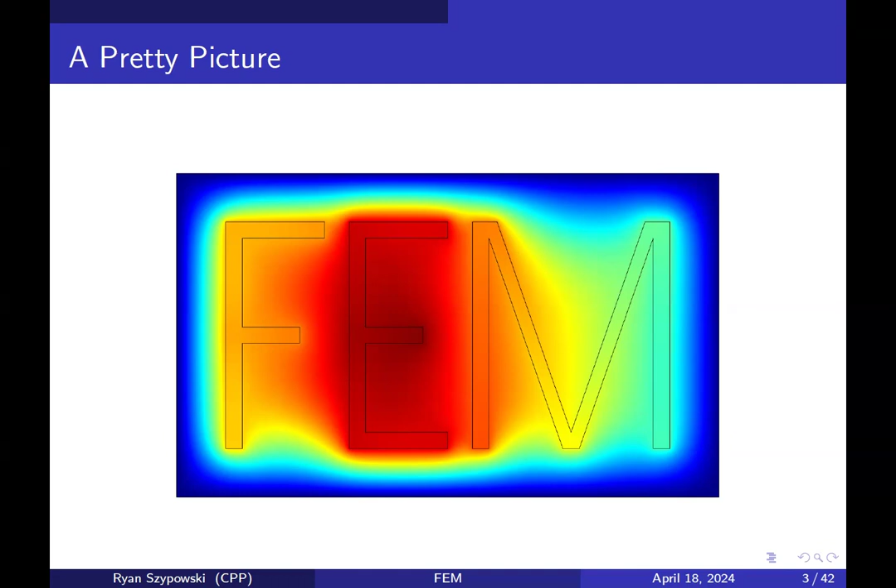So a quick outline, I'll do an intro to PDEs and the finite element method. I'll talk a little bit more specifically about the adaptive finite element method, because that's actually where I've spent most of my own time researching. I'll talk about a few pitfalls that if you're just a user of finite elements, you might end up in. I'll focus on one major one, but there are a number of pitfalls that you might fall into if you're just using the finite element method without really knowing the mathematics behind it.

And then I'll spend some time doing some demos. And those demos are going to be in either COMSOL, or I will also very quickly at least show you some Python code using the package known as FEniCS. And so I'll talk a little bit about FEniCS as well. Before ever being introduced to Dr. Salik and working in COMSOL, I used FEniCS for almost all of my solutions in the finite element world. Either that or smaller packages, like ones written by my advisor originally, stuff like that.

So, okay. So what's a PDE? A PDE, the E stands for equation. A PDE is an equation where the unknown thing that we're solving for is a function. It's a multivariable function, so it depends on multiple inputs, x, y, z, t, that kind of a thing. And then the equation itself has that unknown variable. It appears in the equation differentiated, partially differentiated, right? Because it's a function of multiple variables. So we can't talk about just the derivative. That's a PDE, any equation like that, okay?

They're used to model tons and tons of things in science and engineering. The first bullet point talks about the three classic linear PDEs, the Laplace-Poisson equation, the heat equation, and the wave equation. They're classics because they characterize three very different types of solutions that behave very differently. I'll talk a little bit more about that on the next slide.

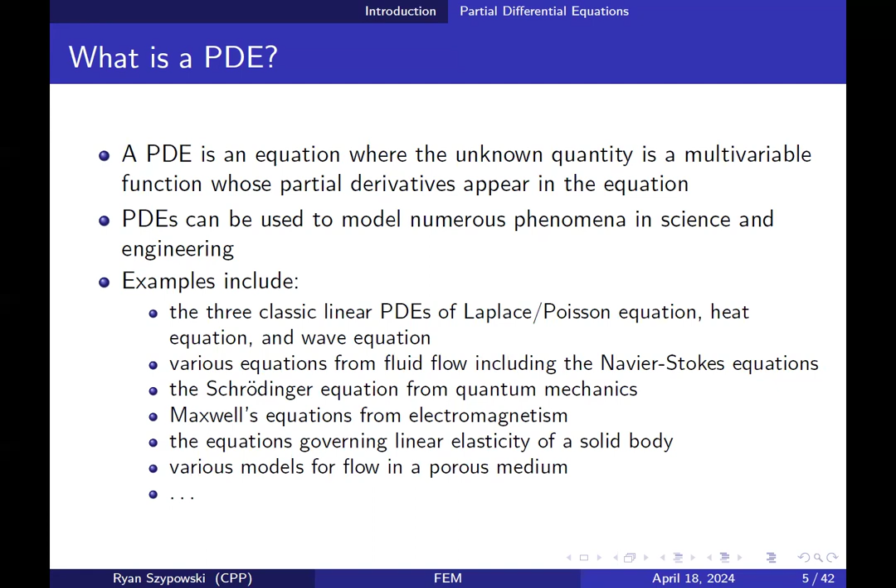Typically, PDEs get classified into three categories. We name them based on conic sections: elliptic PDEs, parabolic PDEs, and hyperbolic PDEs. Elliptic PDEs are generally stationary. They're static in time. So they would be like if you wanted to study the heat distribution in this room, but not changing. So you assume that you've flowed time to infinity and there's no motion in the room. What corner is going to be hot? What corner is going to be cold? That would be an elliptic PDE. And that would actually just be the Poisson equation or the Laplace equation.

Parabolic and hyperbolic equations are time dependent, and they have a very different characteristic. Parabolic equations sort of have a decay. The heat equation is a parabolic equation. So if you wanted to study the heat distribution in this room, but as a function of time, you'd be solving a parabolic equation, whereas the hyperbolic equations are usually wave-like. There's some sort of propagation. There might be loss of energy as it propagates and things like that, but there's much more direct propagation of information in hyperbolic equations, okay?

As I said earlier, most of what I'm going to be talking about today is going to be related to elliptic equations, but the finite element method can be applied in various ways and shapes to parabolic and hyperbolic equations. It's actually quite easy to do it for parabolic usually, where you at least use finite elements in space, and then you just do ODE time stepping in time. Hyperbolic equations are a little bit more challenging usually, but there are techniques there as well.

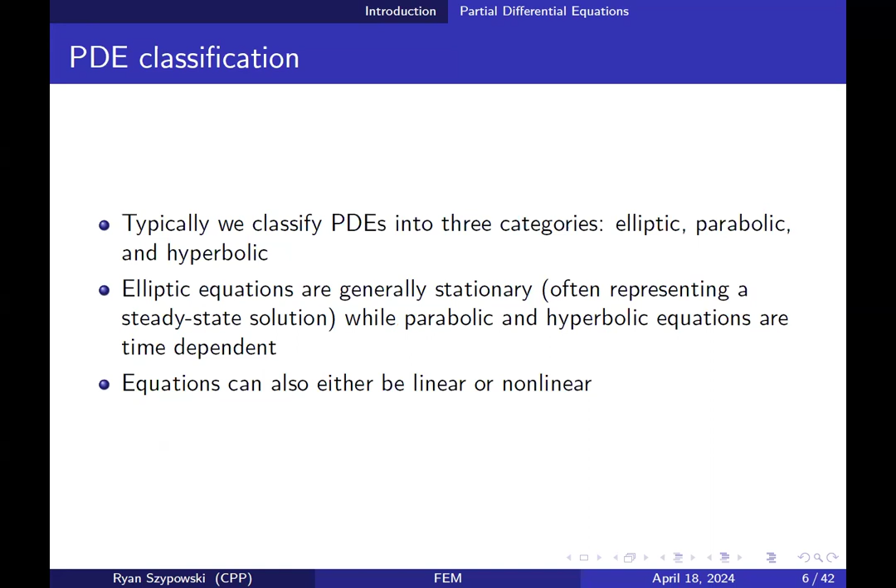So what else is there to do with PDEs though? On that picture, you saw that I was solving this PDE just in some rectangular region. We don't normally solve our PDEs in all of space or all of space-time. We have some bounded domain, which I'm just going to call omega here. And then maybe the problem's time dependent, so then you have a bounded spatial domain and also time going from 0 to some final time.

And then if you think back to your ODE classes that you've maybe taken, where you were solving mostly initial value problems, you had maybe a system of ODEs, or maybe just a single higher order ODE. And then in order to get an actual unique solution to that problem, you'd impose additional conditions on that solution. You'd have the ODE, but then you'd also have a set of initial values.

Well, in PDEs, especially ones like elliptic PDEs, we have what we call boundary values because we impose some sort of conditions around the outside of the domain. If it's time dependent, then we do include initial conditions as well, usually. Okay, these are the typical setups. And then there's lots of different types of boundary conditions. I'll throw some names around throughout the talk, but hopefully from the context you'll pick up what they mean.

But the two classic ones would be what are called Dirichlet boundary conditions or essential boundary conditions. Those are boundary conditions where you specify the value of the unknown function explicitly. And then Neumann boundary conditions, or natural boundary conditions, where you are specifying the value of the derivative of the function, usually the normal derivative of the function on the boundary. You'll see examples of those come up as I show examples of the PDEs later.

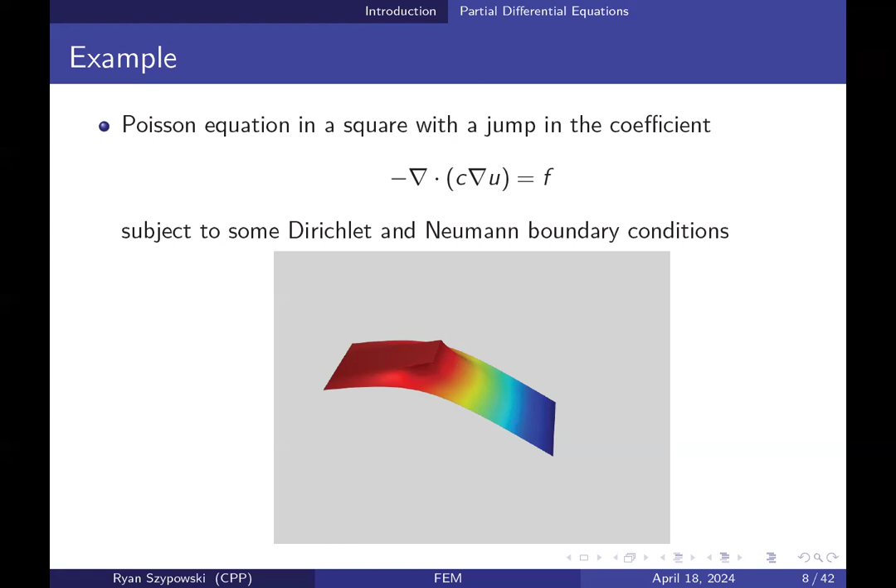So step one of arriving at the weak form is to say, I'm going to test these equations against something. I'm not going to evaluate them at a whole bunch of different x's. I'm going to test them by taking an arbitrary test function v, that is the terminology we use. I might call u the trial function, and then I call v the test function here.

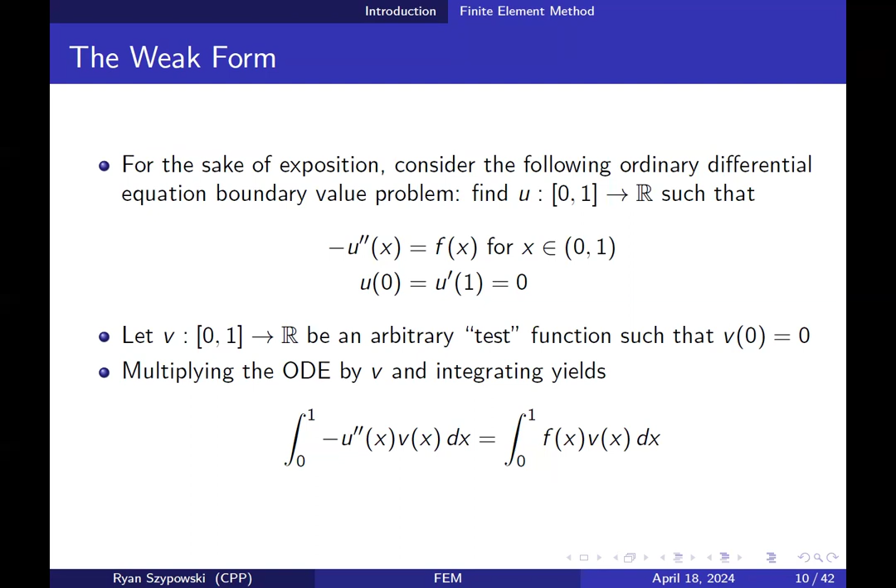So the rule of thumb in the finite element method and just PDEs in general, if you're going for a weak form, is multiply by a test function and integrate by parts. Whatever that means, if you're in higher dimensions, you're using a Stokes or a Green's theorem type thing, but it's all integration by parts. So if we integrate this by parts, that negative u double prime is going to become a u prime, and we will have differentiated the other part, so the v will become a v prime.

So the v du or whatever part is going to be this, right? And then it's an integral on a domain, so we're going to have to evaluate something on the boundary, and in particular this u prime v would need to be evaluated on the boundary. We now see why I included in v that I'm going to enforce v of 0 is 0. I do that so that when this term gets evaluated at 0, I have no idea what this is, but I know this is 0, so it vanishes.

When x is 1, I don't know what v of 1 is, but remember one of the boundary conditions was that u prime of 1 was 0, so I do know that this is 0 and it vanishes. So both terms here vanish for different reasons. One vanishes because of the boundary condition on u at the right, and the other one vanishes because of the boundary condition I imposed on the test function v at the left.

This, by the way, is why Dirichlet and Neumann get called essential and natural. The boundary condition at 0 was an essential boundary condition because I had to bake it into v, into the test space, whereas it was natural that the upper term was going to vanish because the Neumann boundary condition handles that. It handled itself naturally. So at the end of the day, after imposing those boundary conditions, this is the equation we're left with. Look for a u that satisfies this for every choice of v.

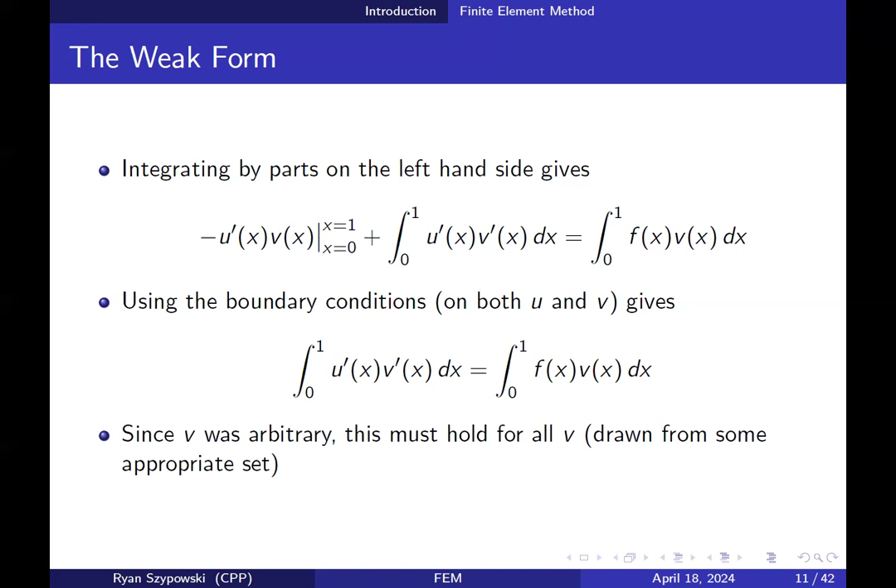And we're now starting to see that every choice of v is a little bit misleading, because clearly something has to be true about v. We see what we do to v in this equation. There's definitely two things that have to be true about v. V needs to be able to be underneath an integral sign after multiplying by stuff, so we need to be able to integrate it. But we also need to be able to differentiate it. So it's not every possible function v, but at least a lot of functions. For example, piecewise linears.

So our weak form is this problem. The full problem in weak form is find u in some space V, I'm just going to be very vague about that, such that the integral from 0 to 1 of u prime v prime equals the integral from 0 to 1 of f v for all v in the space. To make this more rigorous, I'd have to define what the space V is. That would require a discussion of Sobolev spaces and Hilbert spaces, but that's the idea. That is the weak form of a PDE. So this is what I'm going to approximate solutions to, not the original strong form of the PDE.

There is another way to derive this, by the way, that might be more interesting to you if you view problems from an energy perspective. If your PDE really came from minimizing some energy, then this can pop out from that approach as well, where you're just using calculus of variations, and then v is sort of like the variation, right? So, all right.

Let's move on though. So that's the problem that we're going to solve. So how then do we approximate it? Well, this problem I still can't solve exactly, because V is an infinite dimensional function space. I can't describe all functions that satisfy this in any easy way, not with some basis or anything like that, which is what we really want.

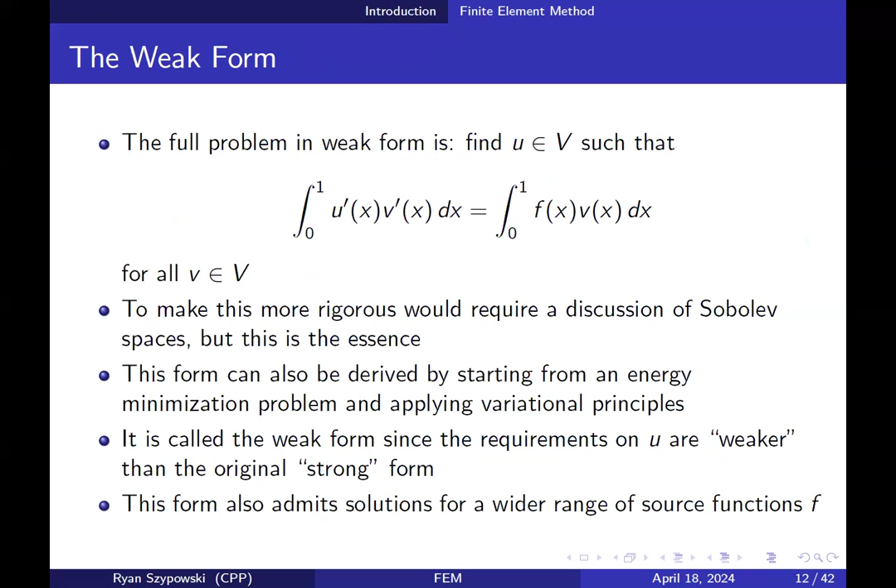So we're going to replace V by a finite dimensional space. And if we do that, then using our linear algebra ideas, there's some basis for it. There's some set of functions, phi 1 through phi n, that when I take all linear combinations of them, they span VH. So I don't look for a U in all of V, I look for a U in the span of this set of functions.

So that means I'm really just looking for some coefficients, the UIs. I turn my problem from a problem about finding a function into a problem about finding a vector. Just a bunch of numbers. What do they satisfy? Well, when I plug this into the equation, this equation is satisfied for all V.

But it can't be all V. That's too many equations. I only have n unknowns, so I need n equations, right? We know we probably want the same number of equations as unknowns. So what do I do? Well, I also restrict V to be in that same finite dimensional space. This is what's called the Galerkin approach.

There are other approaches where you might choose different spaces for the test and trial space. This is the classic Galerkin approach, what you'd see most often in the finite element method. And then by linearity, we can use these basis functions to rewrite this in a much more natural way. So the equation finally becomes this.

I'm really just looking for a vector U with components UI, I running from 1 up to n, such that those numbers times these numbers summed up equal these numbers for every j. That's just a system of linear equations, n linear equations in n unknowns. It's got some complicated numbers in it. These form the coefficients of the matrix in the problem.

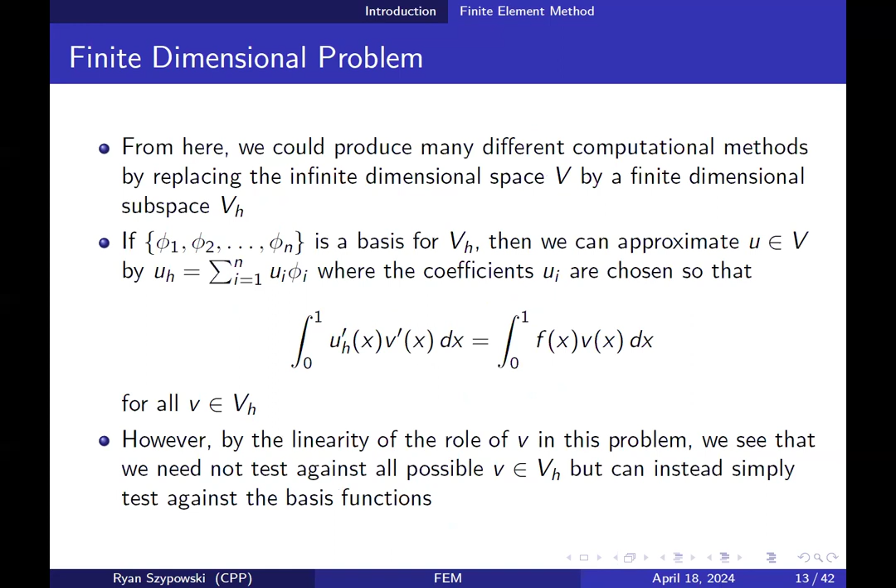We toss this into something that computes solutions to AX equals B, like MATLAB, and we get a set of U's. And then if we want the function, we just go back to this formula, where the solution is represented as a particular linear combination of those functions. So it all comes down to that.

This still isn't the finite element method. This is just a Galerkin method. So what makes it the finite element method? It's a specific set of choices for these basis functions. This works no matter what finite dimensional subspace you pick. The finite element method is all about picking piecewise polynomials or similar things for those basis functions.

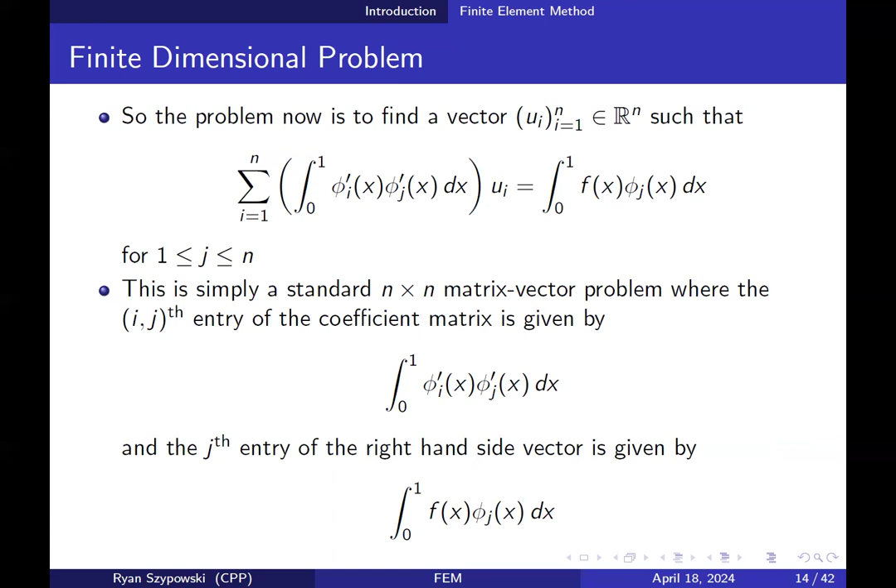So in one dimension, we might take our domain 0, 1 and split it up into subintervals. These would be called the elements. There's an element from 0 to 0.2, from 0.2 to 0.4, and so on. On each element, you define a set of basis functions. If I'm doing piecewise linears, I would have one basis function associated with each node.

So there's a basis function associated with the node at 0. What basis function is it? It's the one that's linear on the element that it's on, goes from 1 to 0, and then it's 0 across all other elements. Then there's a basis function associated with 0.2.

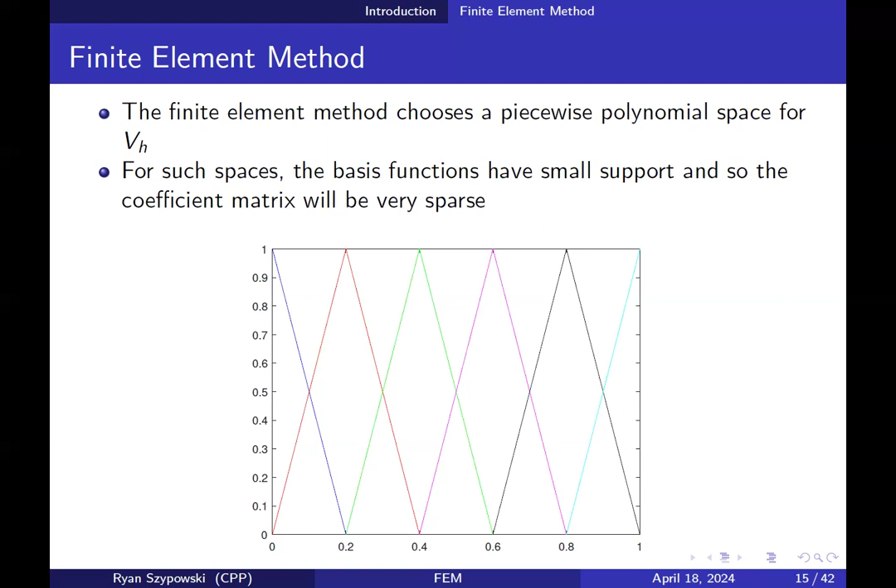That's the function that's linear on the two adjacent elements, goes from 0 up to a peak of 1, and then back down to 0, and then it's 0 on all the other elements. So each of these colors, the blue, the red, the green, the magenta, the black, and the cyan, are each different basis functions. So if I take a span of all of these basis functions, I get the set of all piecewise linear functions that are piecewise linear on that mesh. Okay? And I look for a solution in that space. All right? That's the finite element method.

In 2 dimensions. I can't draw the picture in 3 dimensions, I'd need to be able to do it in 4, right? But that's the idea, okay? And this is the piecewise linear case. It doesn't have to be piecewise linear. You can do piecewise quadratics, piecewise cubics, lots of other things, especially when you get to vector valued unknowns where, yeah, it gets complicated, but that's the basic idea.

So, yes, Ertan. So for example, COMSOL, what is the default choice? Is it usually linear or? I believe the default in COMSOL, every time I have done something for the Poisson equation, it always picks quadratic. It always steps up by 1. And I always drop it back to linear because I like them best. I don't know why. It's because that's where I'm just the most comfortable in all the theory.

And how much does that affect the computation time? So we can talk about the number of degrees of freedom. This depends on 2D versus 1D versus 3D in some senses. If you're in 1 dimension, then the number of degrees of freedom for a piecewise linear is just equal to the number of nodes in your mesh. And then if you step up to quadratics, then you have a degree of freedom at both endpoints of every interval, and you also have a quadratic bump function.

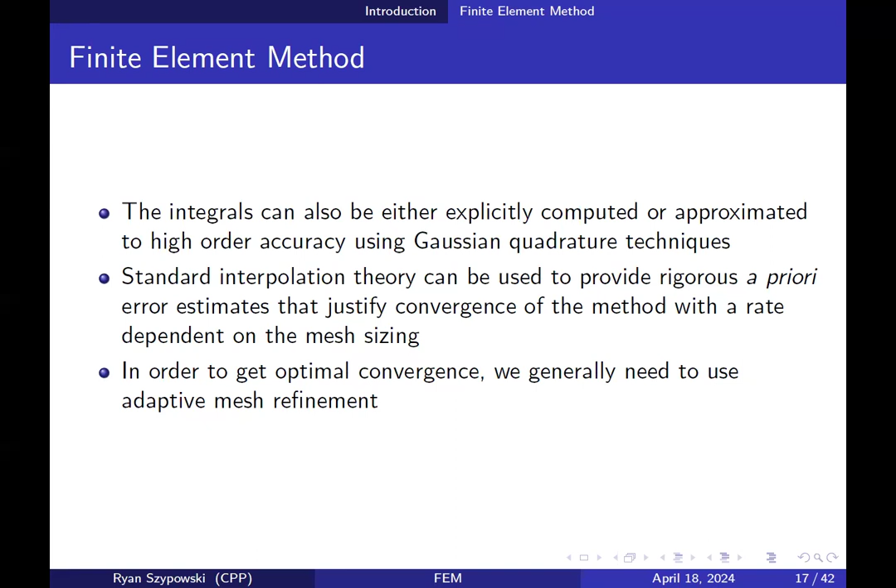I already led to this though, which is the finite element method doesn't just put a mesh, put the basis functions and solve. That's the basic finite element method. But instead, in order to get a more accurate answer than we had a second ago, we iterate a process. We adapt the mesh or the polynomial degree. So this is the classic structure of the algorithm for what's called the adaptive finite element method.

So what is the adaptive finite element method? Well, we're going to start with an initial mesh. Okay? We're going to solve, quote unquote, the problem on that mesh to get something that I'm just calling UK here. Then we do a step which is interesting. So this is one thing I always harp on when I teach numerical analysis.

We are approximating solutions to things. So there's exactly one thing we can never know. We can never know the actual error, because if we had an approximation and we knew the error in that approximation, then why don't we just add those two things and get the exact solution? But we don't know the exact solution. That's why we're approximating the solution, right? So we never know the exact solution or the exact error in our solution, but we can use fancy mathematics tricks to be able to estimate the error by, say, a number.

So what we can do is say, in this triangle, somehow this triangle is attributing 0.5 to the total error. This is a process called error estimation. More specifically, a posteriori error estimation, because we are using the current approximate solution to do that. So we're doing it after the fact, hence a posteriori. We estimate the error, and we get what are called error indicators. They're not error values. They somehow indicate what is contributing to the error being large. And that's what these etas are supposed to represent.

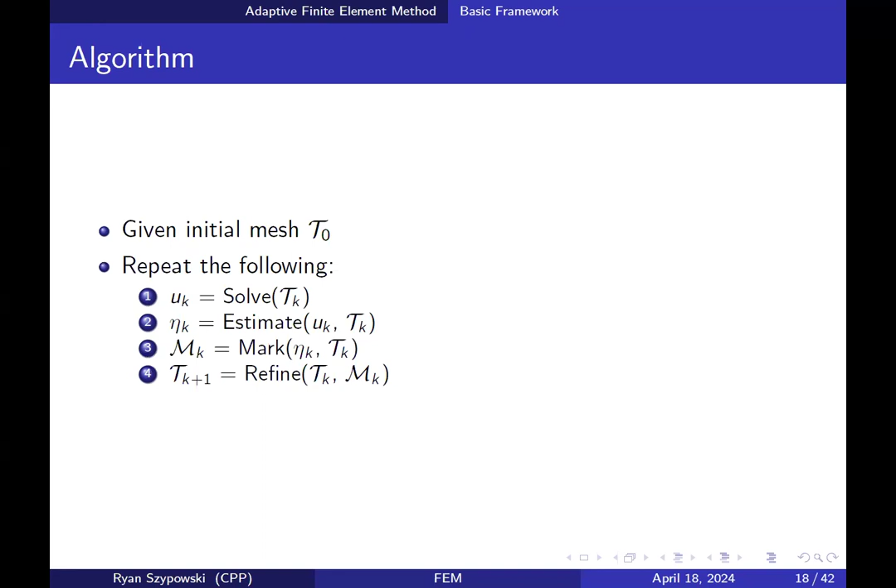And this is the mathematician in me now. It's not just that I expect it, I can prove it. This algorithm is provably convergent for a huge class of PDEs. Okay, so this is where the mathematician in me would spend another 5 hours talking about the theory behind that, but I'm not going to bore anyone with that. Okay, so I'll just go through those steps individually.

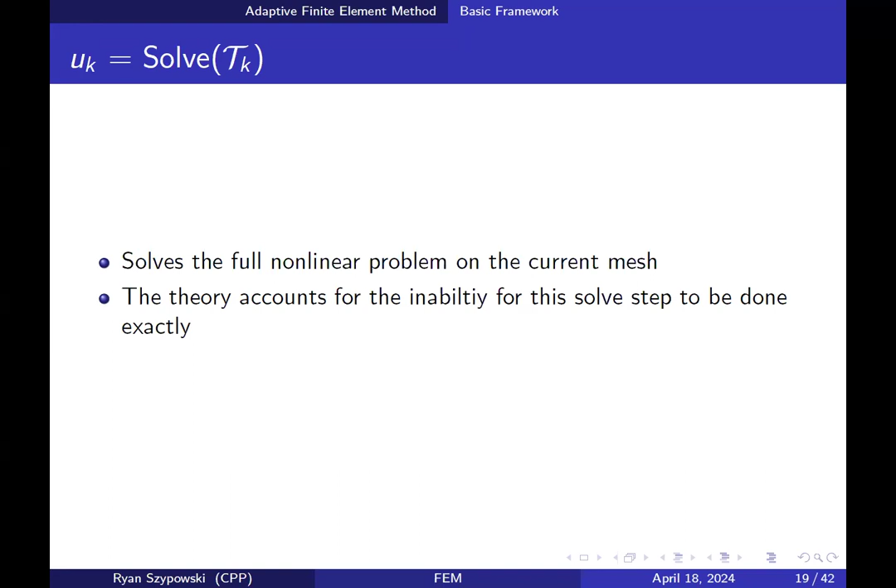Solve the problem. I do want to point out we don't ever actually even exactly solve the individual problem we have, because solving AX equals B is hard. You're going to make errors just when you're doing that. Okay, so the method is robust to that. And I'll talk a little bit about that when I get to COMSOL. Estimating, like I said, is to approximate the error.

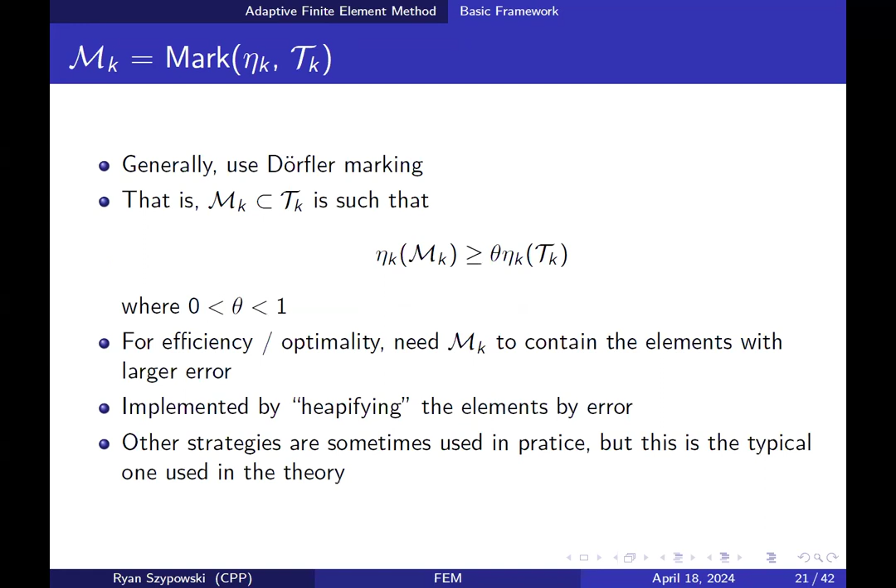Let's move on. Marking, in the theory, is usually done by something called Dörfler marking. But again, when I get to COMSOL, you'll see they don't use this terminology. They don't do exactly this, and it still works. And then finally, refining. This is just to show you that classically in the theory, we use a refinement technique called newest vertex, but that's really hard to implement. So most people implement longest edge.

So now there's this node hanging in the middle of an edge. We can't have that. We need our meshes to be what are called conforming. And so even though this triangle was marked for refinement and maybe this neighbor wasn't, this neighbor might get refined too. So more than just the marked elements get refined. But yeah, that's that. So, all right.

I should probably start doing demos soon, but this is getting to some pretty pictures. This is the pitfalls section, and I'll just talk about this one pitfall because of time. There's a big issue when you're using the finite element method, which is choosing your function space. So for simple enough problems, you can probably just head into COMSOL, have it do its defaults, and you're going to be fine with that.

But if you are solving a PDE more the way I do, which is I don't think of the physics first, I'm sorry, I think of the math. And so I go in and I'll actually show you the interface I've been using most in COMSOL, and you guys might get mad, but it's just the reality. I have to pick my finite element space very carefully because I can't necessarily just rely on COMSOL's defaults. And maybe you shouldn't either as a physicist.

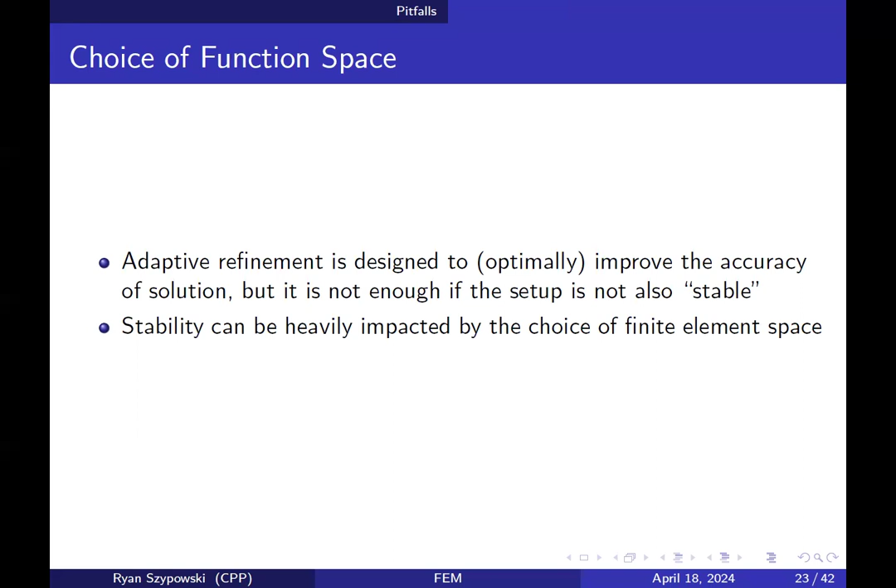I think there's a conversation to have there at least anytime you're choosing these, because I can show you how badly this can go. I'm going to solve a very simple problem very poorly. I'm going to solve the Laplace equation again, the Poisson equation again, but I'm going to do it in a different form, what's called the mixed form. I'm going to introduce a second variable into the problem. I'm going to use the unknown from before, but I'm going to introduce its flux as a second variable. So I don't just want to find u, I also want to find its flux.

Well, one way to do that would be to find u and then differentiate u and get the flux. Or I can put them both in as unknowns into the original problem and solve for them simultaneously. So that's what I'm going to do here. If I convert to the weak form, it looks like this. You now have two test functions, v and tau. And so this has to be true for all choices of tau and all choices of v. And the reason I'm doing it this way is now I not only have to pick a function space for u alone, I now have to pick a function space for u and sigma. And there are a lot of really bad choices for that in combination.

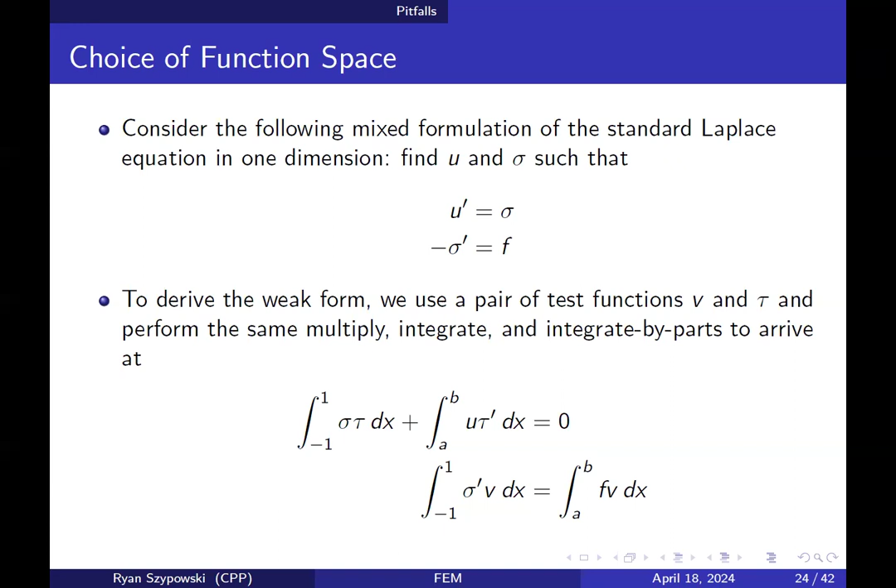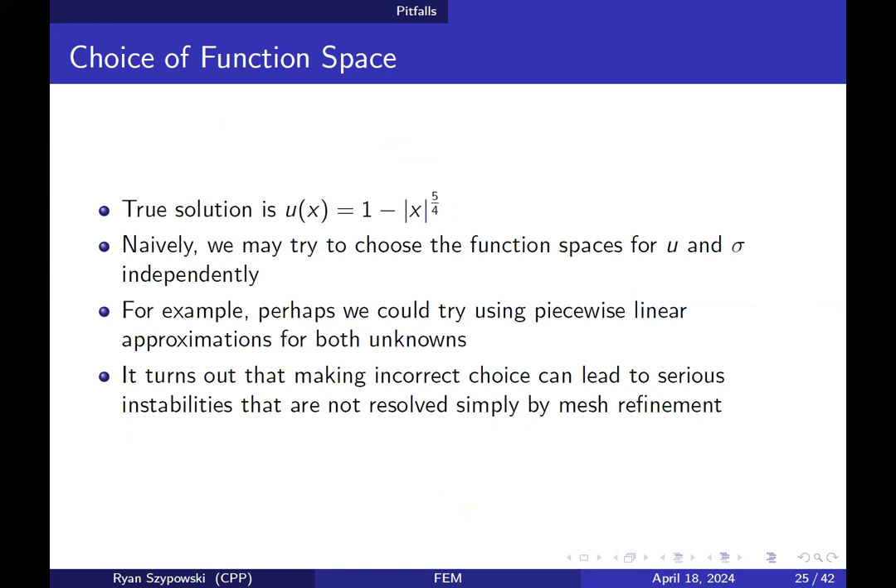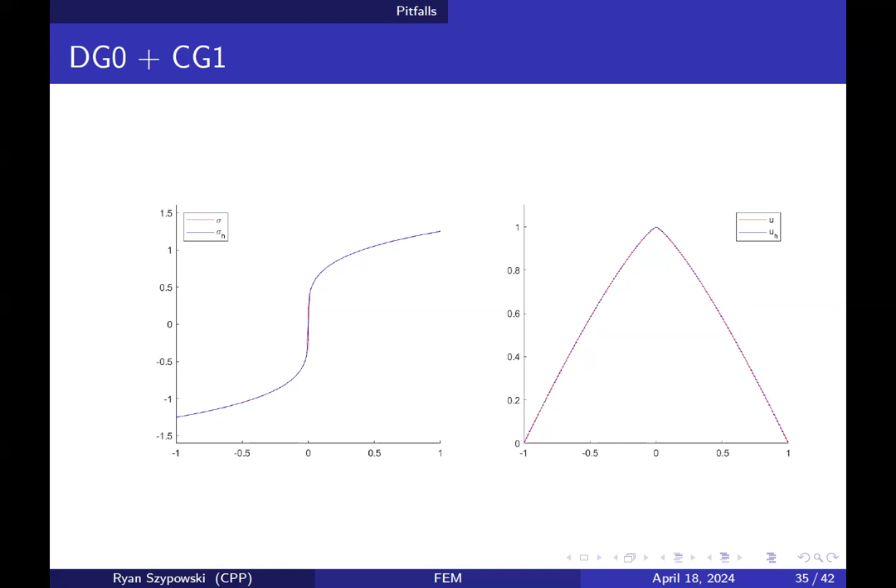So by there, the blue dots are on top of the red dots. I think that's pretty good. So it can work. I just had to pick a different function space. But just to show you that it can go wrong other ways, piecewise constants wasn't the fix on its own. Because if I also tried piecewise quadratics over there, then you still get instabilities. Okay, that's enough of that.

Okay, so let me quickly, because I have like 5 minutes left, right? I want to load COMSOL at some point. Okay.

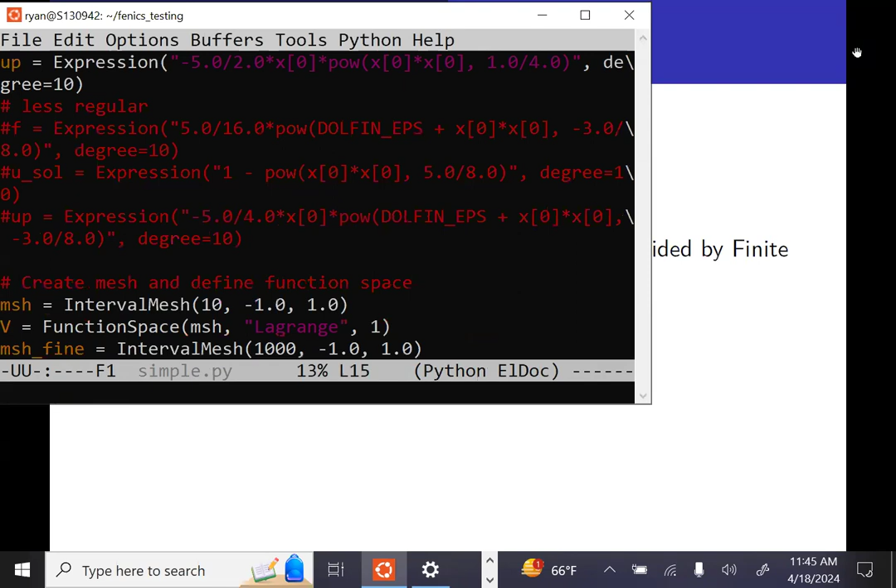I want to show you two things. I want to show you what FEniCS code looks like, just so that you know. Okay, that's unreadable, but it's basically Python code where you type in actual stuff about the weak form and things like that. So down here, let me show you this at least. This here is me defining the weak form.

So this A equals u.dx(0) times v.dx(0). This is saying u prime times v prime integrated dx. So you literally, in FEniCS, you build in your weak form, and then you just say, solve my problem, please. And it does it. So that's FEniCS. It's very useful. It's what I used for most of my career. But what does COMSOL look like?

COMSOL looks like this. So COMSOL is where you can do actual physics, I think. You can do it in FEniCS. People do. You can go to the FEniCS website; I've got it over here if anyone's interested. Like I said, it's just a Python package. You can see that people are doing actual real simulations of fluid flow problems and everything like that. But in COMSOL, the way you're going to do this is you set up the physics that you're trying to solve.

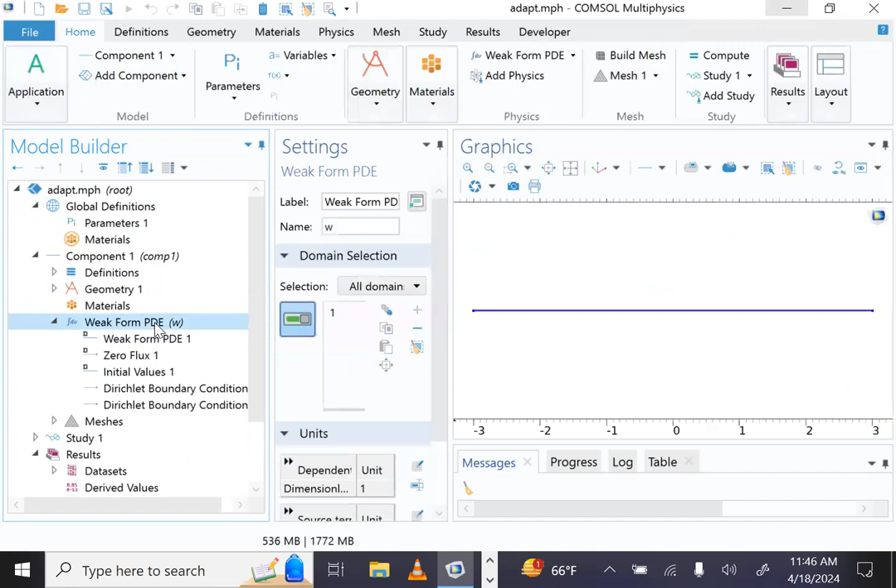And you will notice that this is what I was meaning. I am almost always these days just using the weak form PDE, which is almost certainly what most people in the room would not be using. I like having to write down what my weak form is. So I know I'm actually going to apply it to the Poisson equation, but I'm not going to do that by clicking on the Poisson equation stuff. I'm going to click on weak form, and then type in the weak form. So we add physics there. Let me show you.

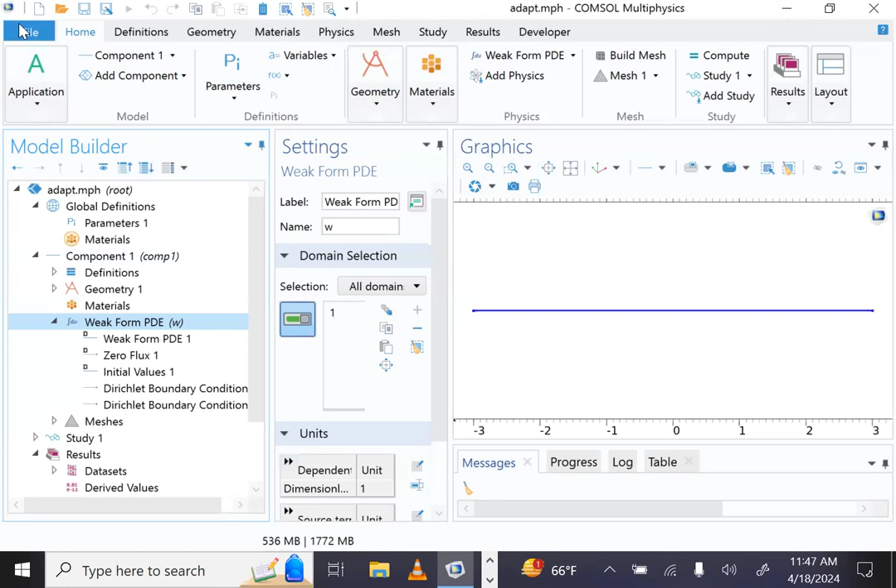So when you go to make one of these models, you go to the new model wizard and you say you want to do a 1D problem, let's say. You folks are probably clicking on, oh, I want to do some acoustics, and I don't know what any of that stuff is. I want to do some math. I want to solve some PDEs. I want to do that in the weak form. That's what I do.

That's a bit of a lie, because when I was doing some of the classic PDEs, I also go and say, I want to solve the Poisson equation. But I don't think about what physics that's representing. I just think about the math. So how do you use COMSOL? You do exactly this kind of stuff.

I'm gonna go back to one of the ones I had a second ago and show some neat things. Where's the one that I want to show? Let me go to open and grab this one. So I made this problem because it's something I did in a paper years ago. I wrote code myself in the paper, and I wanted to see what COMSOL looks like for this. So I'm just going to walk through a little bit here and then point out some of the things in COMSOL.

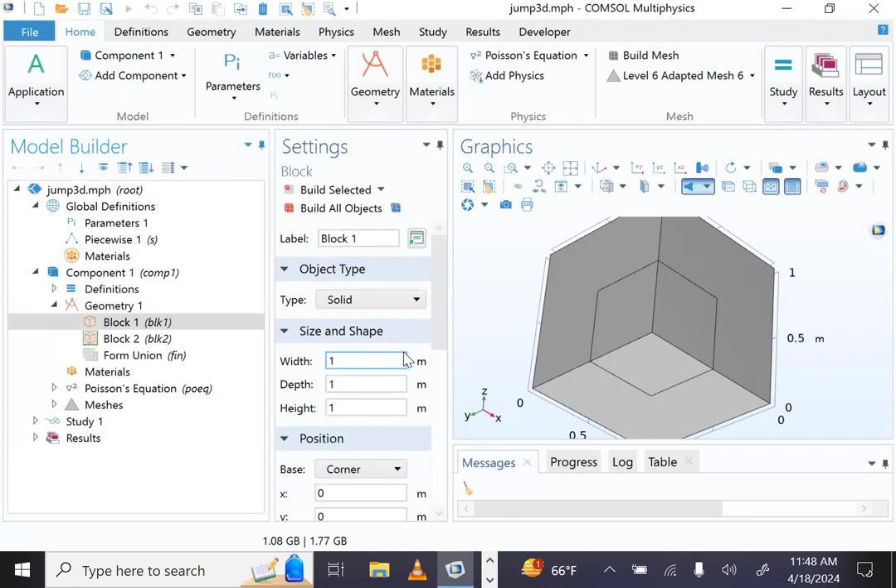This is a Poisson equation. And you'll notice here, it is actually a Poisson equation, not a weak form of a Poisson equation. But it is a Poisson equation with a weird coefficient. So this is me defining the coefficient. You probably can't read it, but I will tell you the coefficient now, because the geometry tells me the coefficient.

This is also where, if I was an expert in COMSOL, I wouldn't do it this way. I'd do it by defining a material, but I have no idea how to do it. So I'm going to solve on a cube, but then there's an inset smaller cube. So this is a 1 by 1 cube, and there's a half by half cube. I'm going to have a large diffusion coefficient in this small cube, and then a small diffusion coefficient in the outside part. That's what we have.

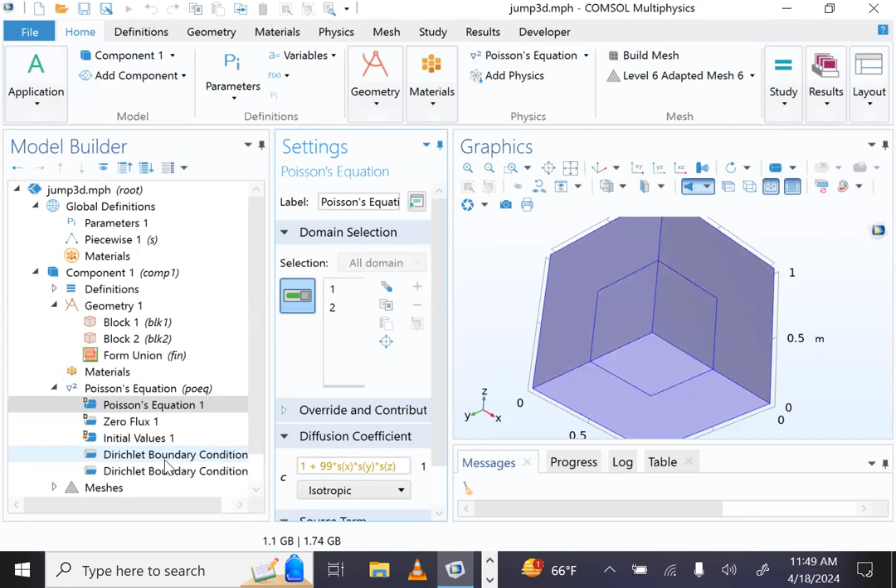And you then define boundary conditions. So my boundary conditions are along this face and the far face. It's 1 here and 0 here. And then all the other 4 faces, it's natural boundary conditions, insulated boundary conditions. And then you build a mesh. Let me show you the mesh I built. And when I say you build a mesh, I mean you click a button and it builds a mesh for you. I did nothing for this.

Though, again, as a mathematician, I do one thing, and that is I always move away from the default on element size, and I always go to extremely coarse, because I don't trust COMSOL to build a good mesh as a first step. I trust the math to build a good mesh. I trust the adaptive finite element method to build a good mesh. So I'm going to start with a coarse one, and then let the adaptive process build up a finer mesh. That's how I always do it.

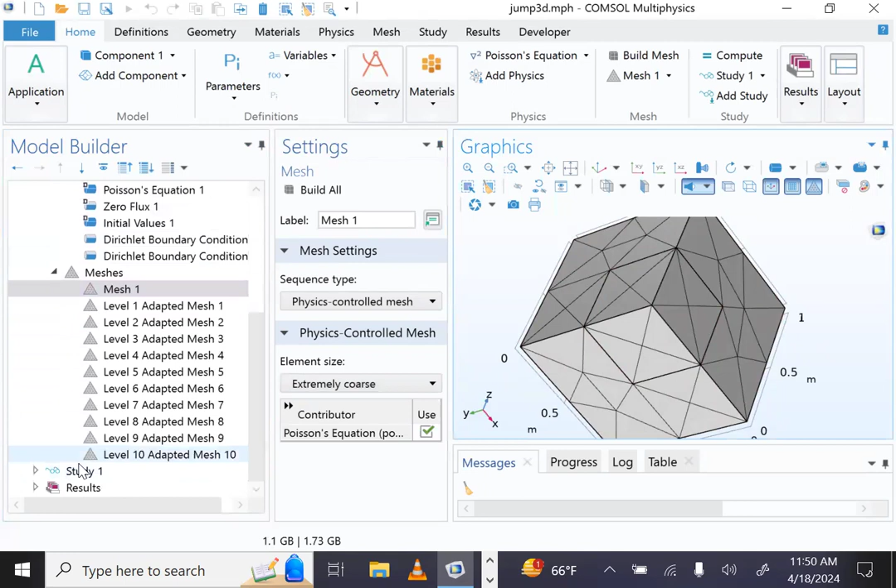This is just the mathematician in me again. So I start with an extremely coarse one, and this is the mesh over here. Whoops, trying to spin the picture. So there's a mesh. It's got a bunch of tetrahedra on the inside that we can't see. And then I go down to the study, and this is where I turn on the magic, which is I turn on adaptation. By default, it's not on. I turn on adaptation and error estimates.

Here's where I go with the defaults, and that's just because I can't find the thing I really want. As a mathematician, what I really want is residual-based error estimation, and then Dörfler marking for my refinement and stuff like that. I go with the defaults, and they seem to work. They work kind of more rapidly, but you set that up, and then you go back up here. Maybe on study, I have to go over here, and you compute.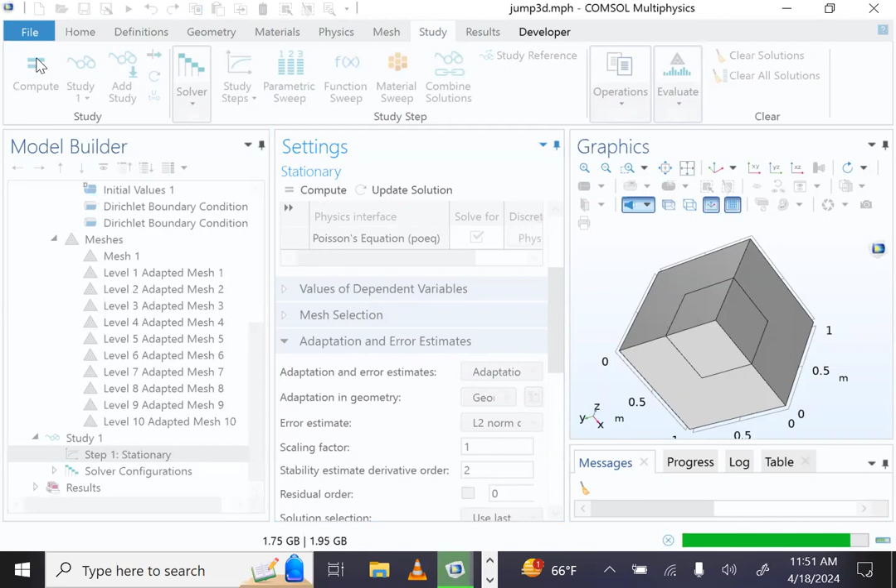You hit the button, and this is on my tiny little laptop. This is maybe not a good idea, but oh, it's actually running pretty quickly. It's going, it's going. It gets slower because the mesh is finer. That's right. So with COMSOL, you can see how well this is converging. You can see how many degrees of freedom there are in the problem, all this kind of stuff.

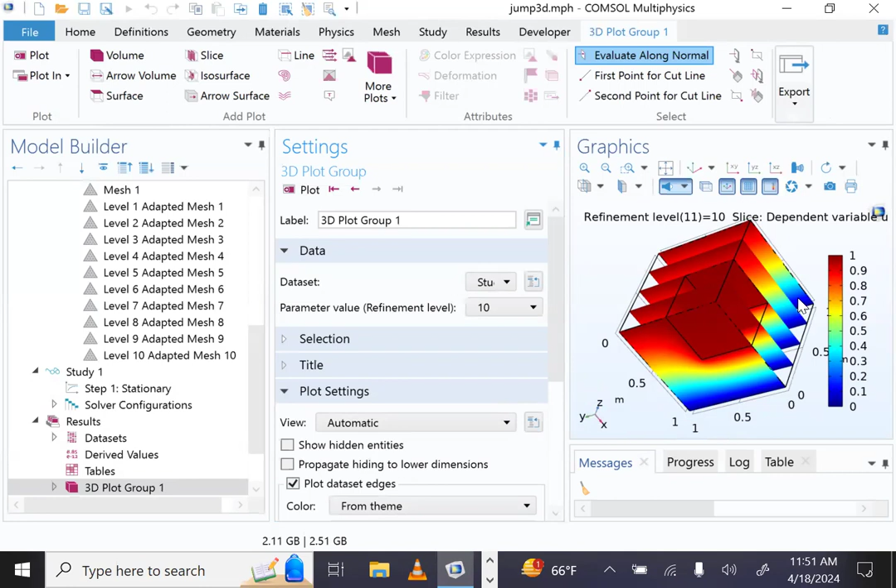And so this is a slice through the solution at the end. We see that in this small cube where the diffusion coefficient was large, the function's fairly constant. It's basically red throughout this whole region, but it still decays down to 0 outside. And here you see it decays down to 0 outside. I'm much more interested in the meshes. If you start looking at the meshes, some interesting stuff happens.

This is one step of adaptivity. Here's another, here's another, here's another. And you're going to notice something happening here. The mesh is getting more and more refined around this point and this point. And that's where the discontinuity in the coefficient is. Here's the best part of COMSOL. You can say, well, I want to see inside. So you just hide this thing.

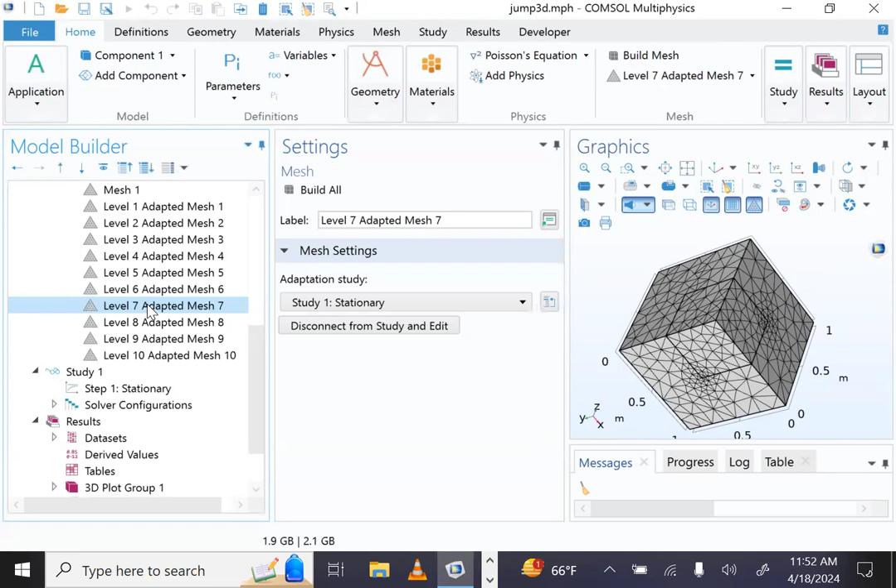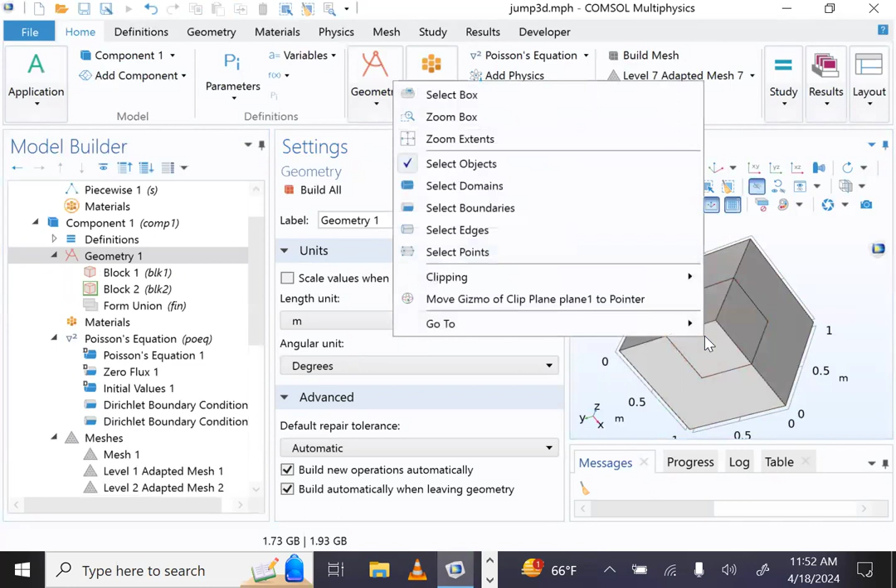Let me see if I can figure out how to do that again. I go to the geometry. I hide. I find a button. I hide the small cube. Did I do that? Not hiding. It's not working. Ayrton, do you remember another way to hide other than selecting it? Maybe I right-click on it and say hide. Is there a hide somewhere in there? Oh no, I did something with Zoom now. Okay, right-click. Well, there is the wire. It's okay. All right.

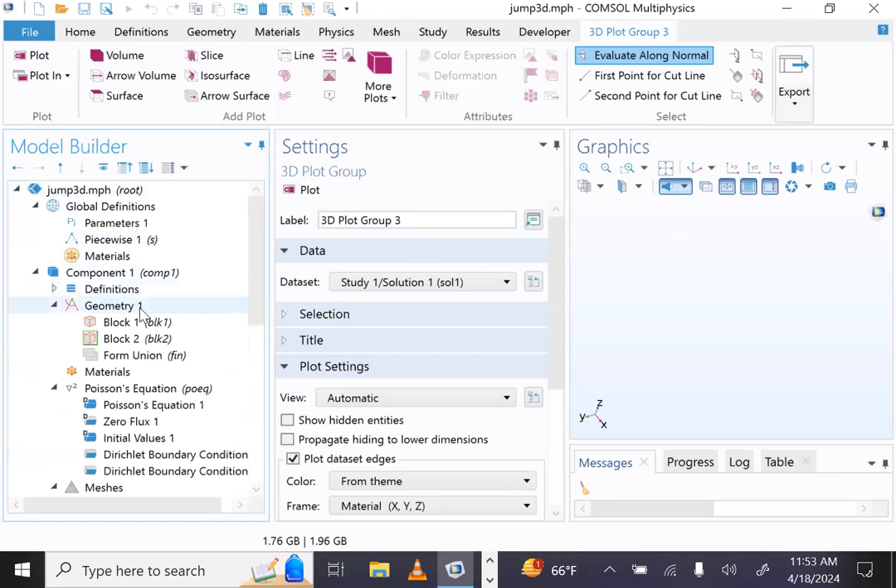But anyways, what I was going to do is show quickly that one of my plot groups was supposed to be the mesh itself. Part of the problem is I did these simulations on my desktop, so I didn't have to wait too long. And then I copied them over here, and I think the graphics on this are much worse. So it's slow to draw stuff. Oh no, I think what's happened is I've hidden everything. I really have hidden everything.

Right click. That's not it. Let's just try to hide just this one and then go down. It's possible that that's what happened. Yeah, there we go. Okay. I figured it out.

So I hid that cube, and you see that in fact it refined a lot along this edge, a lot along this edge, and it didn't refine as much here, but it started to refine more and more as it went in. And again, that's because we had Dirichlet boundary condition here, we have Neumann here and here, so the physics is different here.

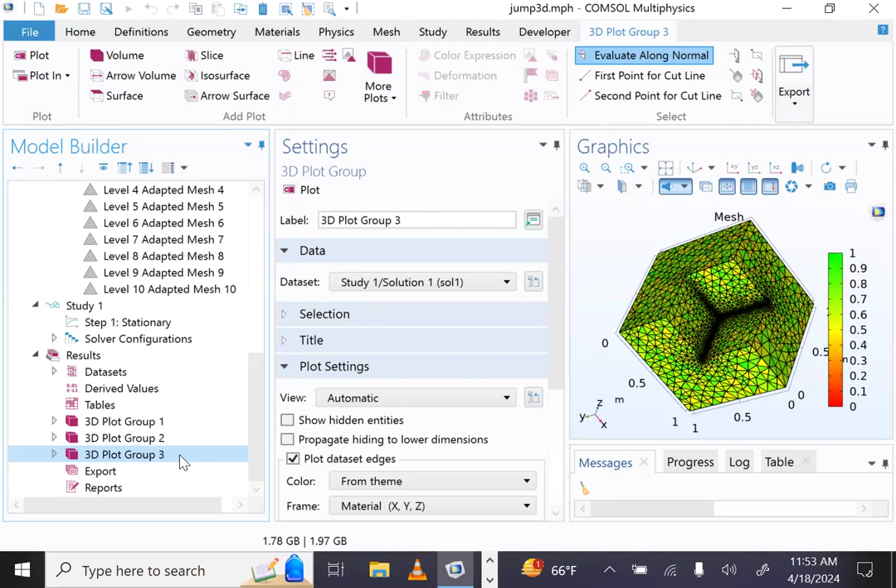Anyway, this kind of stuff is what I do for my own work. I study this sort of thing. I don't usually care much about the physics, but I care about the mesh generation. I care about what comes out, that kind of stuff. So when we solve it with the default choices, COMSOL doesn't do adaptive. By default, it doesn't. You'll have to go into the study and turn it on.

And again, there's a question of how much time you have, right? So I started my mesh coarse and I let the adaptation make it finer and finer and finer. You don't have to do that. You could start with a fairly fine mesh and then do just maybe 1 or 2 steps of adaptation. I started with a really coarse one and I did 10 steps.

So that's another thing I had to change, by the way. To get it to do 10 steps, I had to go down here and say I'd like the maximum number of adaptations to be turned on. By default, it's turned off and then the default is low. I turn it on and I say something much larger. So I do that sort of stuff when I'm using COMSOL.

But again, I'm using COMSOL from a very different lens than most physicists in the room probably would be using it. Maybe I'm giving you good advice. I have no idea, because I don't know how good it is for the physics. I know it makes me happier as a mathematician though. That's what I go for. I just want to be happy.

Okay. So I think for standard problems that I assigned in wave optics and E&M, those are very simple problems. I think default choices are perfectly fine. The issue is when you have a complicated structure with very thin nanostructures or these nanocubes, nanorods, whatever, then obviously you need some sort of this. Because otherwise it will just average over things, or it will not look at the details there unless instructed to do so.

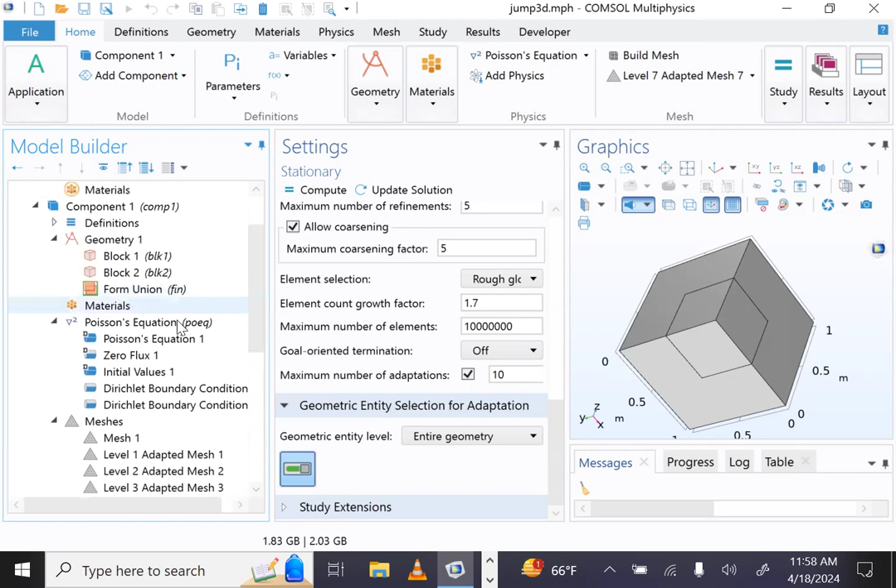Let me point out one last thing in COMSOL. Like I said, the other thing I always change is I always go back to piecewise linears. If you want to do that, that's where the discretization is. So in the physics, you go over to the settings for the physics, and there's a discretization there. So Lagrange is just another term for this idea of building your basis functions like this. And then you could choose quadratic. Oh, accidentally, I think I was on quadratic, folks. You could pick linear, or all the way up to septic degree.

You can change from Lagrange to different ones. So for example, I had talked about using discontinuous ones. So you can use discontinuous piecewise polynomials, any sort of other thing. So yeah, those are all in there. Nodal serendipity is something that a postdoc of mine had been working on in the office with me when I was at UCSD. So I know a little bit about it, but it's just another way to describe the basis functions. It's all neat stuff. It's all cool math.

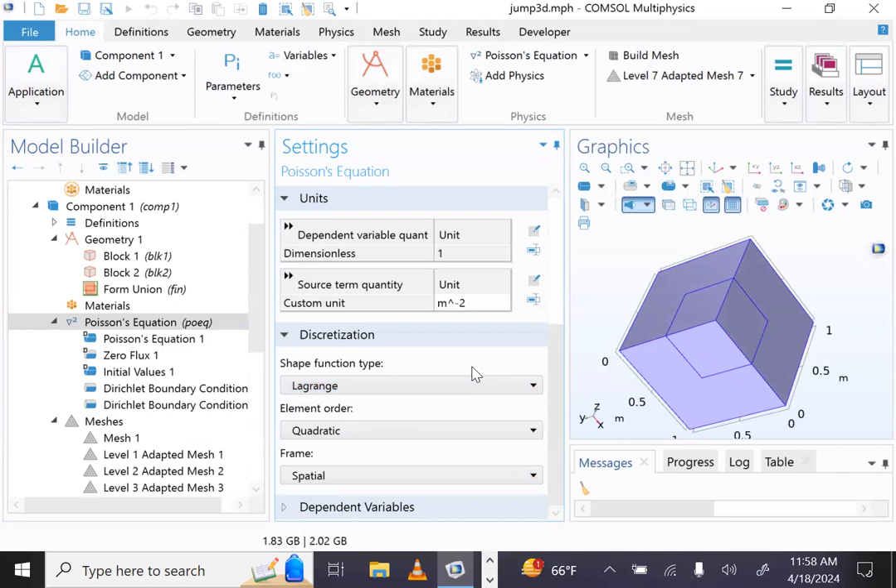I don't even know if I had any more slides in my talk. I must have, but let's just do demos. That was the slide. I had a slide that said demos. So I think I'm done. I can show people more things in COMSOL and stuff like that if anyone's interested, but yeah, that's all I have for everyone today.

Almost out of time, so very quick questions from students if they have any. Do you know anything about any sort of machine learning or neural network research in helping out these approximations? So there is current research being done by various people, not myself, who are trying to solve PDEs by training. So what you do is you train a neural net on, like, here's the inputs to a Poisson equation, here's the outputs, train it on that over and over again, and then you say, okay, well now what's the solution to this one? And they are getting results that are reasonable.

At the end of the day, and I didn't talk about it here, all that comes down to is approximation theory. Piecewise polynomials, the reason why as a mathematician I like them so well is because I can prove theorems about how well you can use a piecewise polynomial to approximate an arbitrary function. I didn't write the theory down, but there's order h or order h squared, where h is the mesh size. I can write the theorems down. Machine learning, neural nets, they're just a way to do very complicated function approximations.